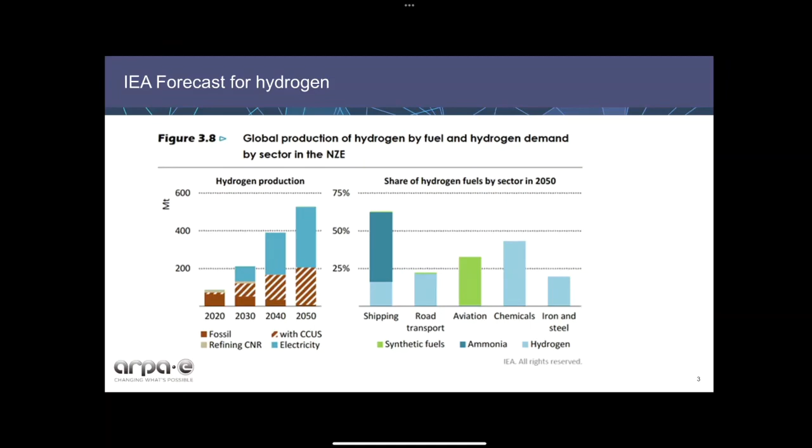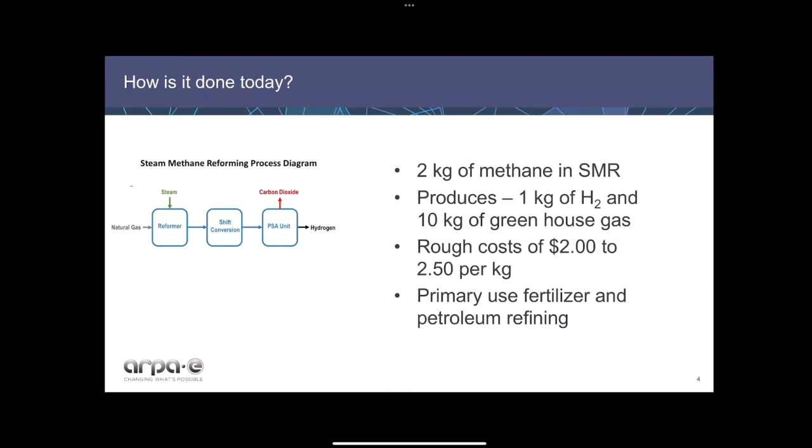So it's actually one of the largest contributors to greenhouse gases right now, even at the low production we have. Rough costs are somewhere between $2 and $2.50 per kilogram of hydrogen for that. Primary use right now is fertilizer and in petroleum refining, basically for upgrading in the oil industry.

So projected going forward, and there's lots of stuff. I mean, there's large amounts of money. The US government is dumping $4 billion, I believe, right now into hydrogen hubs. The vast majority of these are going to be going into carbon capture with SMR. And to make that 200 million tons that we're projecting in the future, it's 400 million tons of methane, roughly 20% of the global production of natural gas right now. They're talking about just going into the hydrogen side.

This is going to produce the 200 million tons of hydrogen. We have 4 gigatons of CO2 directly coming out of this to sequester. So that's 4 billion tons of CO2. And this really doesn't count the CO2 and methane leaks across the line, which are going to cause a lot of other issues.

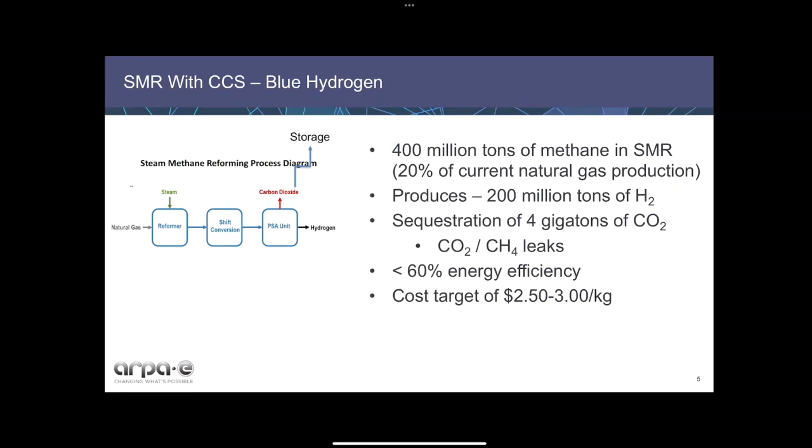Less than 60% energy efficiency. When you add it in, SMR is roughly 60% BTU conversion from methane into the hydrogen. This is less than 60% because you're spending a lot of energy capturing the CO2 and driving it underground. I've seen cost targets of $2.50 to $3 per kilogram for the hydrogen coming out of this. I've yet to see anybody who's demonstrated it yet at scale.

The other thing to look at is green hydrogen. This is the other majority of what the IEA is projecting. Take 18 kilograms of water, 46 to 50 kilowatt hours of electricity, and you get a kilogram of hydrogen. There's 3 routes out there being pursued: alkaline, solid oxide electrolyzers, polymer electrolyte, PEM cells are being looked at for this.

Your energy efficiency, so energy in versus hydrogen energy out, is somewhere in the 60 to 68% range before compression. So please keep that in mind. The numbers I'm talking here are the hydrogen bubbling out of the electrolyzers.

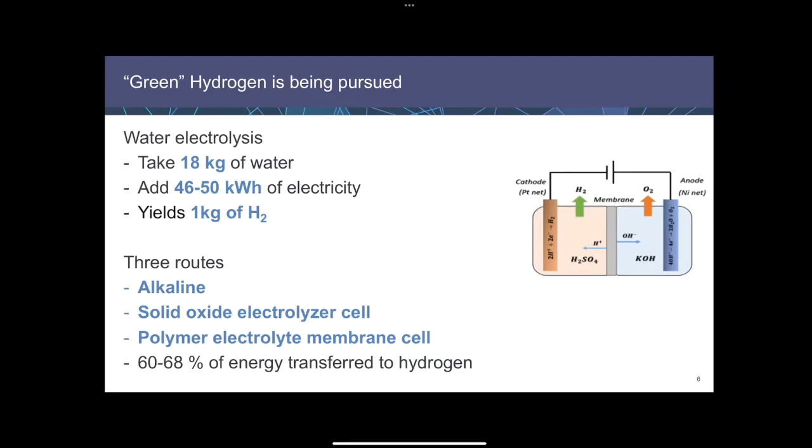To do our 320 million tons of hydrogen, and again, this is a conservative number. I've seen projections where people are now talking about 1 billion tons of hydrogen needed. So keep in mind these numbers could be double it. You have to put in 15,000 terawatt hours of electricity to do this. And this is going to require somewhere between 2 and something over 5 terawatts of generation capacity to do this. So the higher number is based on intermittency.

So everybody comes back, and you'll see this coming forward, such as the DOE Earthshots. To get the really cheap hydrogen, they say we're going to have solar and wind. It's going to be almost free. But then you have to worry about capacity factors. The sun only shines, wind is only so dependent. And if you have to start shipping in electricity from 2,000 miles away, the costs go up. So the higher number is for intermittent.

And keep in mind the global energy generation capacity right now, everything, nuclear, fossil fuels, wind, everything is 8 terawatts of capacity that we have in place right now. So this is a huge amount of electricity just to do a small portion of our energy demand.

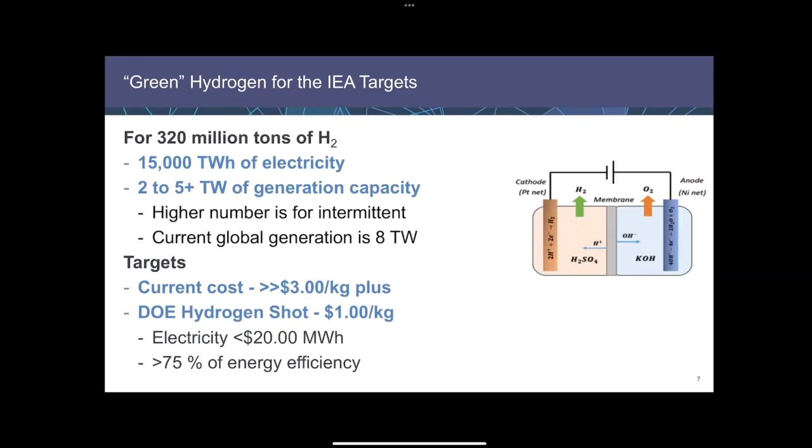So green hydrogen also has a materials challenge, and this is really my way into it, was from the mining side, because I have programs in the mining space, to look at what's required for this. And for 320 million tons of electrolyzer capacity, I took some of the numbers off of here, but for intermittent, we're going to need 2 to 4 times that electrolyzer capacity, just waiting for the intermittent electricity to come along.

So we're going to be looking at somewhere around a billion tons of electrolyzer capacity if we want to use intermittent. PEMs, platinum group elements, big challenge on how we're going to get that. I've seen forecasts that are anywhere up to 50 times current production of iridium is going to be required for PEM electrolyzers.

Solid oxide systems, you have lanthanum and yttrium as the primary solid oxides. And even alkaline, you're looking at nickel and zirconia that we really don't have a lot of. I mean, there's a fair amount of nickel, but class 1 nickel for this, you're competing with batteries. And what everybody forgets about is what goes into that intermittent electrical generation.

So for 5 terawatts of wind and solar, it's about 50 million tons of critical materials that go into that, to generate that material. So huge numbers. By the way, 50 million tons is 10 times our current production of those materials, just to power hydrogen.

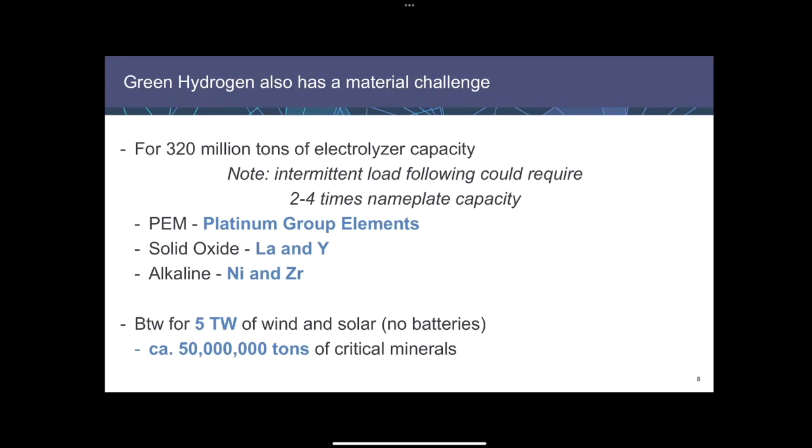So you're going to hear people talk about pink hydrogen. There's going to be a presentation to the Schlumberger people today saying, oh, nuclear is going to take care of it all. If we do that and we look at small modular reactors as being pushed by the DOE right now, these are about 30 megawatts per reactor, 0.27 terawatt hours per year per reactor of total terawatt hours. You need about 56,000 of these by 2050 to do that.

And by the way, the base electricity price, the lowest I've seen is $50 per megawatt hour or 5 cents per kilowatt hour. You take that into the hydrogen costs, and just your electricity cost is about $2.50 to $3, just for the electricity.

So pink hydrogen, by the way, I hate colors. I'm totally convinced that somebody's going to look at this with all these rainbow colors, and they're going to say, woke hydrogen, we don't want it. Get ready for it.

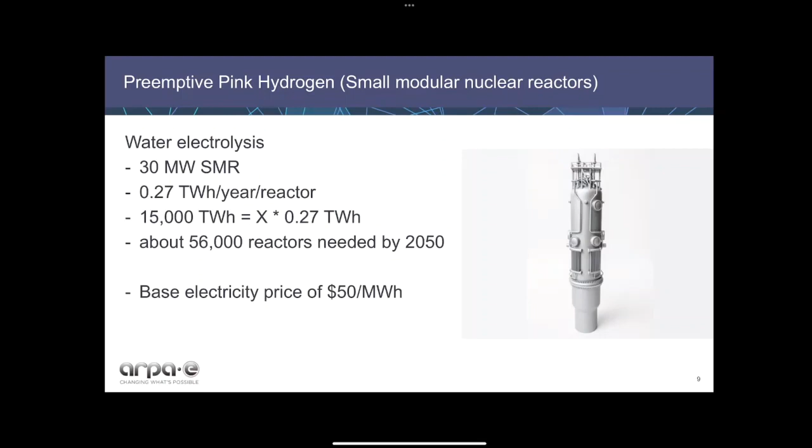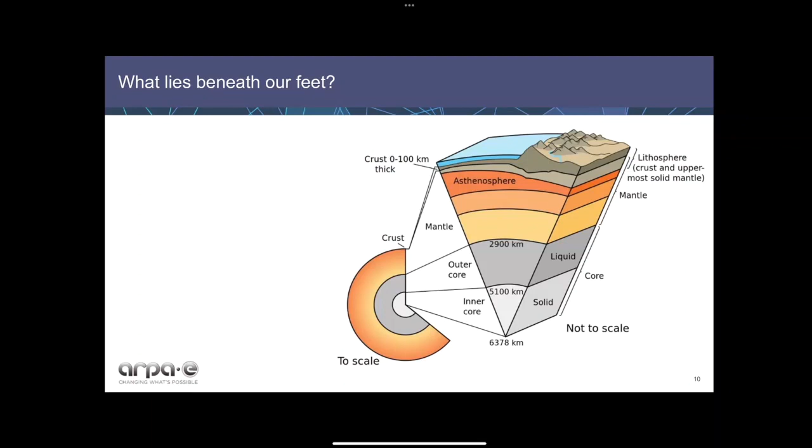So what lies beneath our feet? I kind of look at it and say, what can we do? And this is why I'm here, because you guys think about what's under our feet, and how do we exploit it, and how do we get through it. So the Earth is continually producing hydrogen. I mean, there's a huge amount of hydrogen being produced by the Earth.

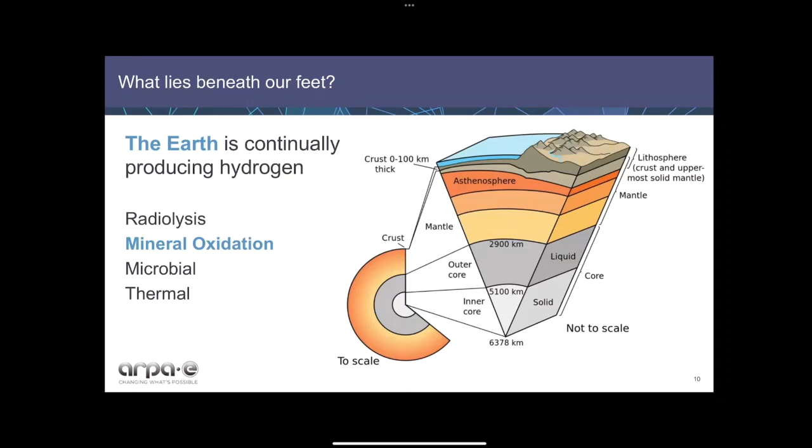Several different methods: radiolysis in the deep earth, mineral oxidation, microbial effects, thermal effects, all types of things taking place in the deep earth. The numbers I've seen are somewhere in the billions of tons of hydrogen that's being generated every year by the Earth. We just don't pay attention to it. A small amount of it does come up to the surface, and we'll talk about that.

Roughly 23 million tons is now the accepted number. It's probably going to rise pretty soon once they fully characterize what's coming out of Yellowstone and other thermal springs. That's currently coming up, and it's diffusing out. Some of it's escaping into space. Some of it is reacting with things in the air.

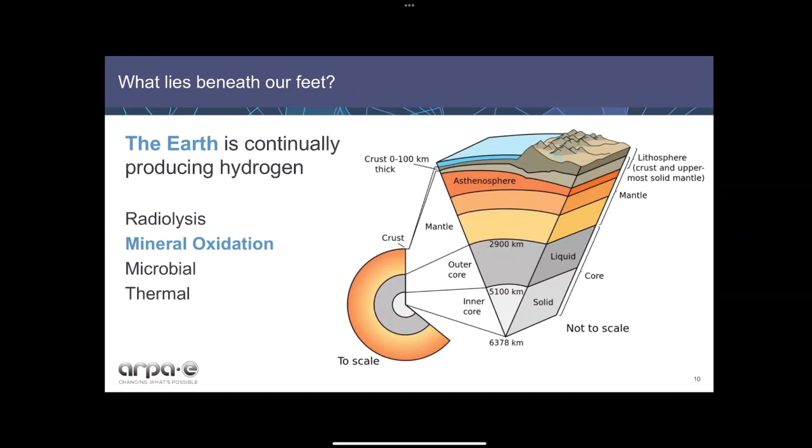So, seeps are found worldwide. So these are locations where people have actually found hydrogen percolating to the surface. And when we look at this, this is either gas coming out, free gas percolating out, inclusion gas where they're finding it in rocks, or water saturated with hydrogen.

So they're finding it. You'll see a huge emphasis on Russia and Western and Eastern Europe. For some reason, the Russians really like to track all the gases coming out of their systems and publish it. In the U.S., we don't pay as much attention to what's coming out in the gases, or we don't publish it. So lots of stuff. You'll see a number in the United States. By the way, this is filling in very rapidly since Slava wrote this paper. There's a whole bunch now being found in Brazil and Africa.

And this is one of my favorite ones. This is the eternal flame in Turkey. This is where the Olympic torch came from. It's a high hydrogen seep that's been burning for at least 4,000 years, and it's got a high concentration of hydrogen. It's got some natural gas in it, that's why you can see it. There are other hydrogen seeps that are burning that you can't see because hydrogen burns clear. And so they've found some basically by getting burned as they got close to it.

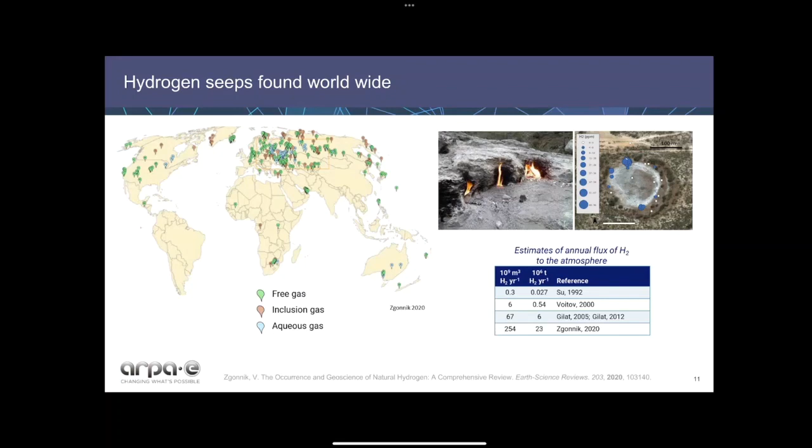So the concentrations of gas coming out in these locations can be really high. And this is a graph, and this came out from Alexei Milkov last year. He went through and took all of the reports of hydrogen, the concentrations, brought them back into rock types, and began to say, well, how much is there?

And so on the left is the concentration of hydrogen. And what I want to really point out to everyone is these types here on the left. These are not the types of rocks you guys have been drilling in for oil. These are very different areas. And so somebody's always asked, well, we've poked enough holes in the ground with the oil companies. If there's hydrogen out there, they would have found it. No, first of all, they're not looking for it a lot of times. They don't measure it. And second, you're just drilling in the wrong places for this.

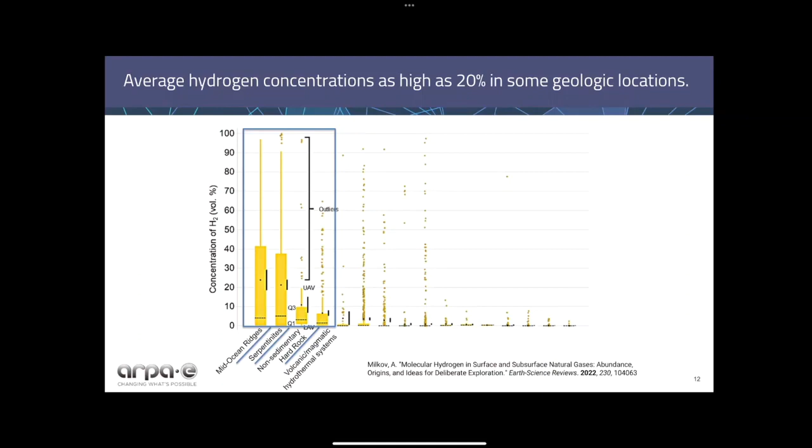But there's concentrations out there of all different ranges, all the way up to 98% has been found in deposits that are out there. We'll be touching on this. And so where does hydrogen accumulate? One of the classic examples is outside of Bamako in Mali. This is looking at the system from space, looking down on it. This is a huge fairy circle, right? You can see the distance, about 1 kilometer across.

A group out of France, I can't remember which one of the energy companies of France, is trying to exploit this. By the way, they found this by accident. They were drilling for water, and somebody walked up with a cigarette and the well blew up. And it was just like, what? This clean explosion just blew everything up. And somebody heard about this in France and said, natural gas. And they went down and blew up a few more things, but came back and really started doing measurements saying, oh, hydrogen.

And the graph on the right is the emissions across this fairy circle. So they're picking up hydrogen that's diffusing out of the ground into the air. And when they drilled into it, they found out it was 98% hydrogen, free hydrogen gas. And this is an area where they've drilled down and actually found hydrogen at a whole bunch of different levels that's being trapped underneath a variety of sedimentary traps, competent traps that hold it in place. And they're still working on how big this is and whether they can commercially deploy it.

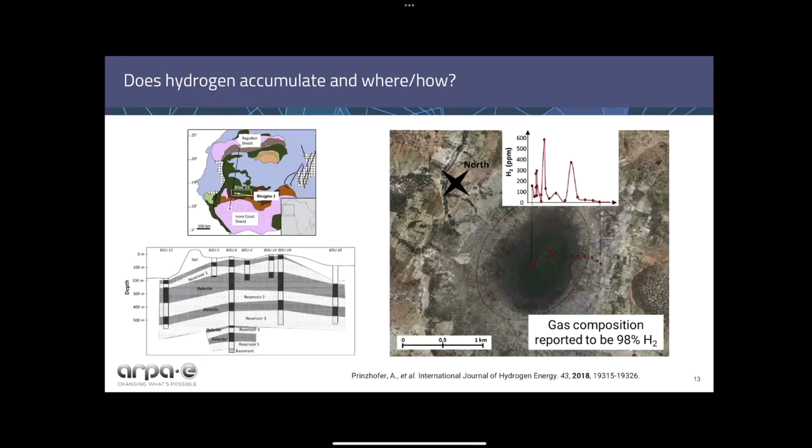Okay, and one of the first things we did was ask, could you make money off of this at $1 a kilogram? This is a calculation we did early on: if you only have to drill 100 meters, you could use water drilling rigs, PVC pipes going down, cheap costs, and a hydrogen flux of 1,000 cubic meters per day, which is about what these guys have published. It's not a huge amount, but this could come in at $1 per kilogram at this depth. Of course, then what are you going to do if you only have 1,000 cubic meters per day? It's really not worth looking at.

And we have to look at that, this is a small fraction of what an average natural gas well is. So the question is, can we take this and stimulate it? So it has enough to power a little PEM electrolyzer, and probably continue to power part of Bamako, Mali with this.

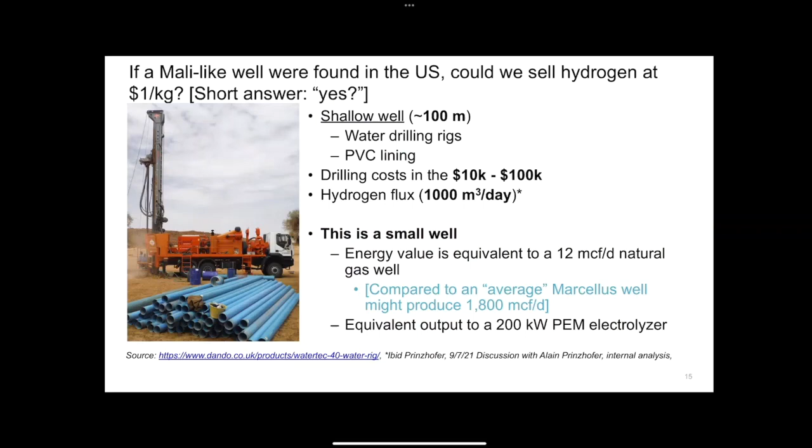So a number of things are going to come back, and we have to look at concentration. And again, this is for natural deposits. We have to look at concentrations, how deep they're found. And you can see conventional reservoirs over here. This is your guys drilling for oil.

We're finding low concentrations, and there's actually really good reasons why there's low concentrations in natural gas, because if it was there, it could be turned into something else. But we can find a variety of different concentrations. The thing I want you to pay attention to, again, is the hard rocks, is where you're finding high concentrations close to the surface. All the high concentrations are in hard rocks. So it's taking us away from where the oil and gas people like to drill.

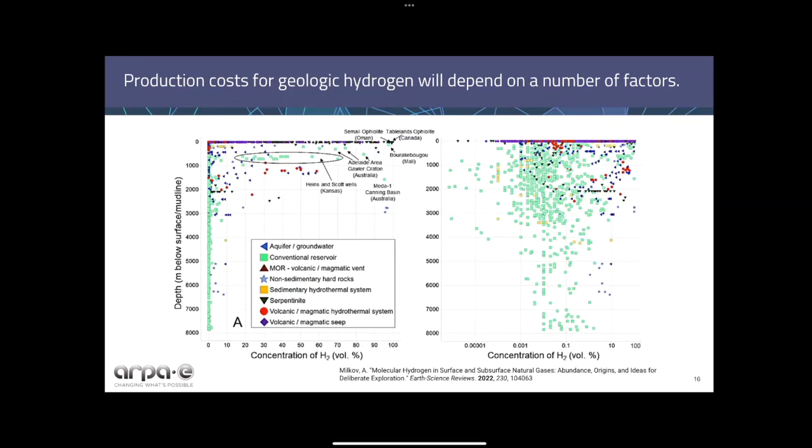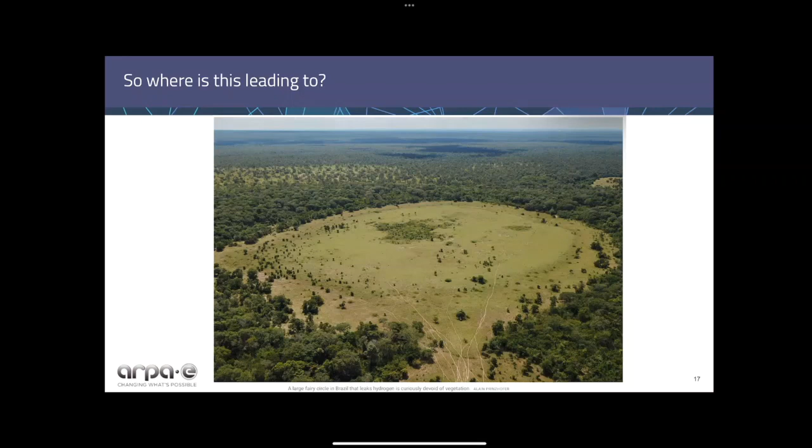So this is from the Science article that just came out, and begin to look at and try to understand where this hydrogen is coming from, and then why. Take that information and come back to say, why am I here talking to Schlumberger about this?

So there's a variety of mechanisms. As I said before, you have the radioactive methods, you have the iron oxidation, you have abiotic methods and the likes, with a whole bunch of stuff eating it and surviving on it. By the way, the vast majority of the hydrogen that's produced on the Earth goes into microbes. Keep in mind that underneath our feet is well over half the biomass on Earth, and the majority of it is powered by hydrogen.

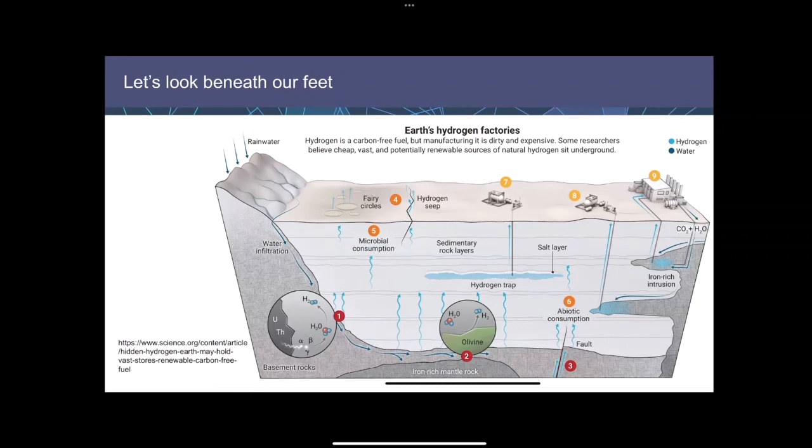So what's happening underneath our feet? Again, we have radiolysis, serpentinization, deep-seated, which is tectonic plates ramming together and causing all types of piezoelectric reactions to take place in hydrolyzed water or powered water. And the loss mechanisms, we have some coming to the surface, small amount, microbes and abiotic reactions. And the abiotic, you guys can look at and say that's future oil. So this is where a lot of the oil is coming from.

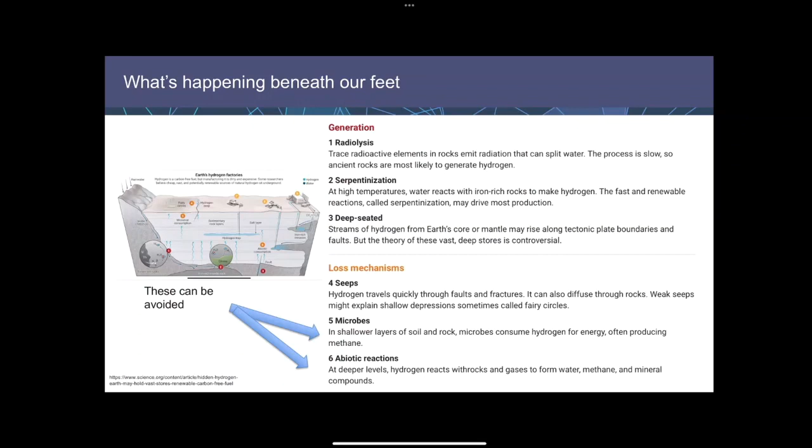And what I'm going to posit to you guys is we can avoid these. These two can be avoided, the abiotic reactions. And if I look at the generation of the system, I can control the chemistry of serpentinization. So this is a chemical reaction. Radiolysis is deep in the Earth, unless we're going to find a way to inject thorium down into the deep Earth and allow it to power the formation of it. The serpentinization I am very attracted to, because, again, I'm a chemist, I look at this and say, I can drive this reaction.

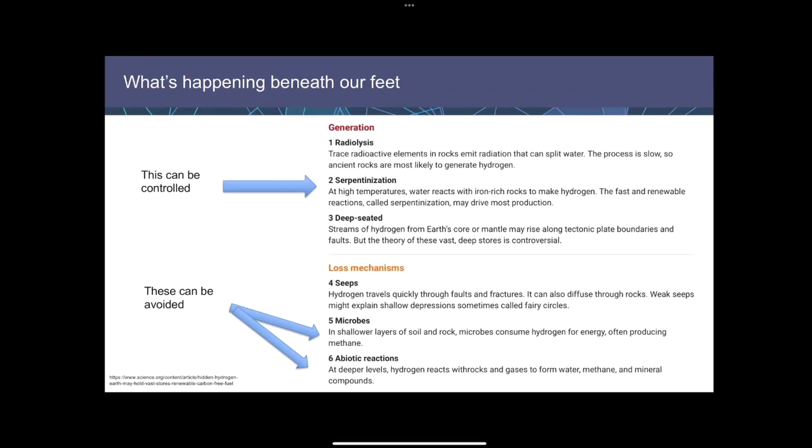And this is a specific reaction we're going to look at. Very simple, iron 2 compounds plus water gives you iron 3 oxides, rust, and hydrogen. It's a very straightforward reaction. The important thing to keep in mind, if you look at the Earth's crust, 5% of the Earth's crust is iron 2. So if you look under your feet, wherever you are, you're going to find iron 2 beneath you. Everything below the surface, again, is very reduced. We live in the oxidized portion of the Earth. The reduced portion of the Earth is beneath our feet, waiting to be oxidized.

The one thing I should have written on this, and I need to update this, is an equilibrium. This reaction is an equilibrium reaction. It's not a one-way. It's not thermodynamically precluded, but it is not favored based on equilibrium. Equilibrium lays way to the top. But if you take out the hydrogen, it is a very fast reaction. So you can get this reaction to go in what I like to say is the attention span of a graduate student if you pull away the hydrogen.

So in the deep Earth, quite luckily for us, equilibrium lays to the top. If the equilibrium did not weigh to the top in the deep Earth, we'd be living in a hydrogen atmosphere with no oxygen or water, because there's enough iron 2 down there to consume everything.

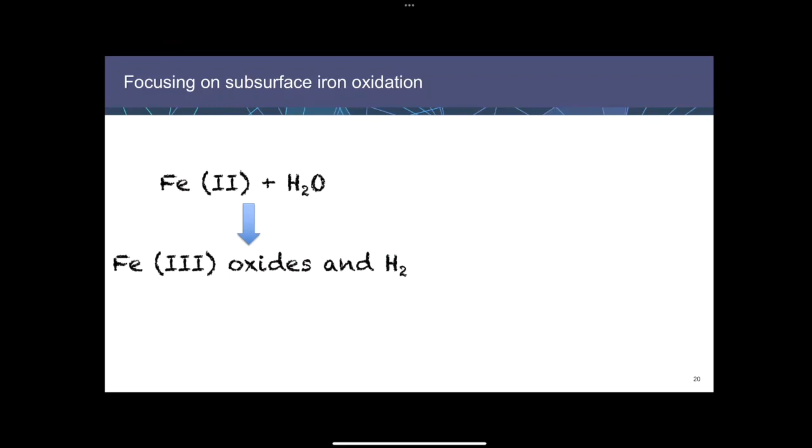So 5%. So what is the potential? If you look at this primary target, in situ oxidation of iron 2 with water, 5% of the Earth's crust being iron 2. Estimates on this, looking not at the ocean side of it, so just on land, within the range that you guys can get to, are 10 to the 15th tons of hydrogen potential laying beneath our feet.

I mean, that's millions of billions of tons for those who could do the conversion quick in their heads. So it's millions of billions of tons. The thermal energy of that far exceeds all the fossil fuels underneath our feet. It's just sitting there.

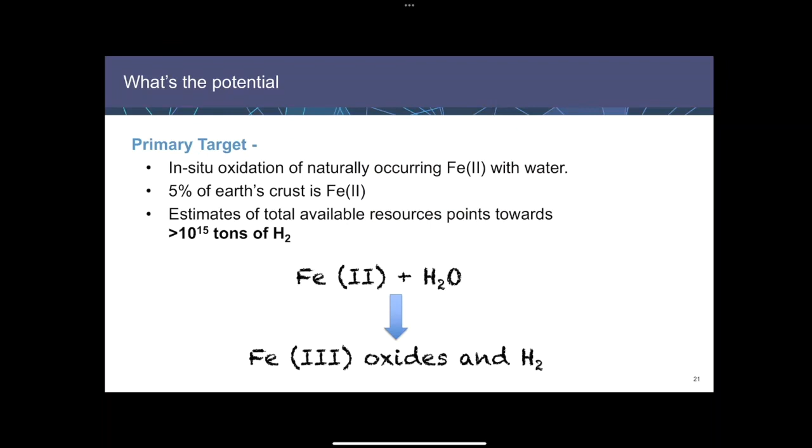I talked about Geoff Ellis at USGS. He's doing a fantastic job of modeling resources for this right now. I fully encourage, if you haven't had any contact with him, that you have him in to give a seminar, which will be much more informative than mine in terms of the basic science of it.

He's developing models looking at sources, migration pathways, reservoirs, traps, seals, preservation, timing, taking all the things that have been done before for oil and gas accumulations by the USGS. So really in-depth models of this stuff, really looking at the important differences. Hydrogen generation is really fast.

It's not like oil and gas, not like methane, where you're looking at geologic time spans to get your future oil. This stuff is forming fast. Again, if you allow the hydrogen to diffuse away, the reaction's almost instantaneous. Hydrogen's much more diffusive, it's slippery, it's going to diffuse away, and this has big impacts on this.

There are solubility differences. At ambient pressures, the solubility of hydrogen in water is close to nil versus methane. And it's also more reactive in both biotic and abiotic systems than the hydrocarbons. So there's a bunch of challenges we have to look at. And he takes these kinds of systems and has developed some great mapping capabilities.

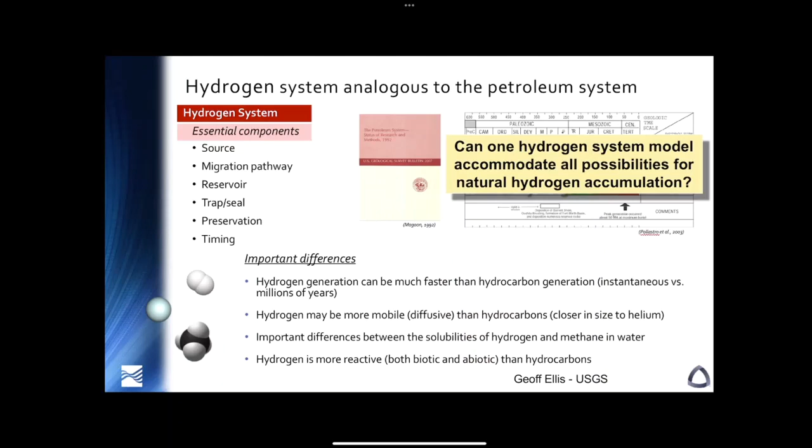He's asking, can I come up with one hydrogen system to model all this? And the answer's going to be no. But quite interestingly, he already has the programs set up. You can type in the different variables that you want and begin to map where we should be looking for hydrogen.

The whole thing, from Oklahoma all the way up to Michigan, up to Canada and back down to Michigan, is loaded with olivine. The same thing is found off in the Carolinas, and there's a belt going across Arkansas.

These are massive deposits. One thing I want you to keep in mind is that oxidation of iron 2 to iron oxides forms a 60-40 mixture of magnetite and hematite. Don't ask me why, I just can write it out. Find yourself a good geophysicist or geochemist to explain why.

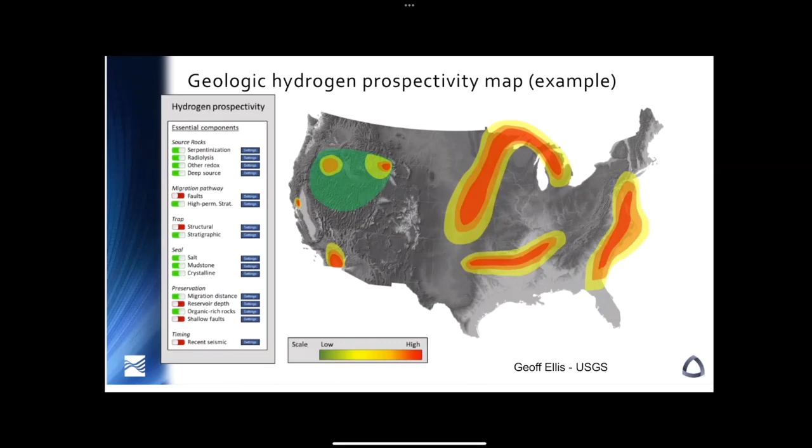So you might be breathing hydrogen. The water inside of you might come from hydrogen from geologic sources. So now we're going to get into what I'm thinking about, and really what I want your input on. This is quite critical for us.

Again, when we talk about 10 to the 15 tons, as I've told people, this is like the multi-billion-dollar lottery ticket. It's worth spending $20 on, just in case, because it's potentially a limitless supply of energy for us. So we're looking at 3 tracks. Can I affect the chemistry of this reaction? Can I stimulate it? Are there ways to catalyze this reaction? And there are, by the way. People are coming up with ways to catalyze this and make it go faster.

We need work in the geology, really coming back to identification of these deposits far beyond what the USGS is trying to do, because then we need to bring in things like permeability. How do we identify competent cap rocks? Because really what we want to do is be able to stimulate this and concentrate it under the ground.

By the way, people have asked me, could you dig up these rocks and do it? And it's like, no. In an olivine rock of 10% FeO, you're looking at 0.5 kilogram of hydrogen per ton of rock that you dug up. So it's not worth digging up billions and billions of tons of this stuff.

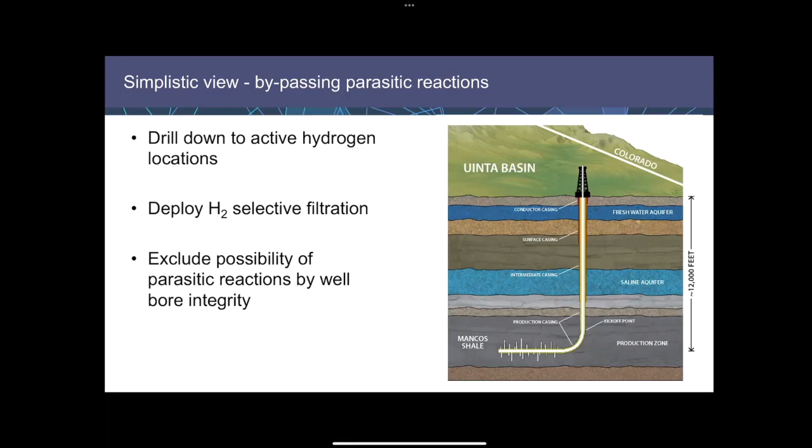Can we take a simplistic view and really take lessons from our geothermal colleagues who are looking at enhanced geothermal? Basically drill a couple wells, inject water into an appropriate ore, suck out the hydrogen. It's been oxidizing the iron, so you get no digging, no byproduct separations.

By the way, the one thing I want to note here is this is not an energy carrier. This is a primary energy source. So unlike the electrolysis of hydrogen, it'd be pretty stupid to electrolyze hydrogen like you see the Japanese talking about doing, and then shipping it up to Japan, burning it to make electricity. You're losing a lot of efficiency in doing that. This is a primary source. So not an energy carrier, just the primary source.

And by the way, the EGS people are finding hydrogen. If you take a geothermal well in Iceland, it's producing 1 million kilos of hydrogen per year. So it's happening, and it's vented into the air, along with all the CO2 that comes up with the rocks. The EGS people, I asked them, what about hydrogen in your systems? And they're like, oh yeah, we see it. We don't tell anybody about it. We find a lot of it when we start, and we find a lot of it when we stop. And if you think about this, they're not pumping a lot of water down when they're starting and stopping. So they're actually getting a continuously fairly high flow.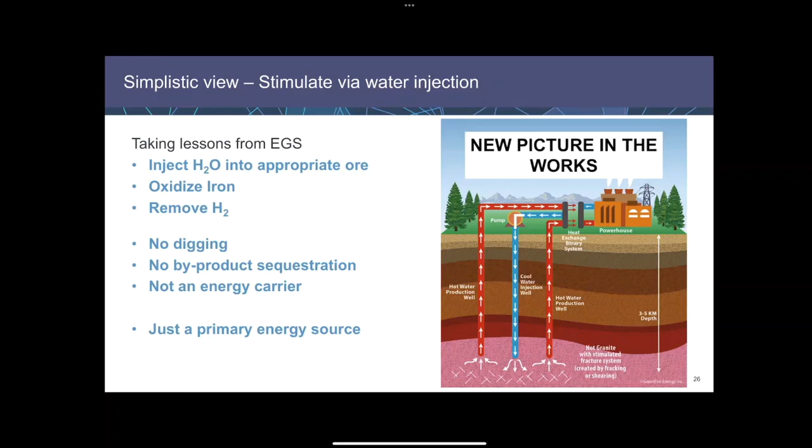So it's been mentioned when we talk about stimulating this reaction. This is some really neat work, again, that was published last year. So everything, by the way, you'll notice a lot of 2022s coming here. So this is a building topic.

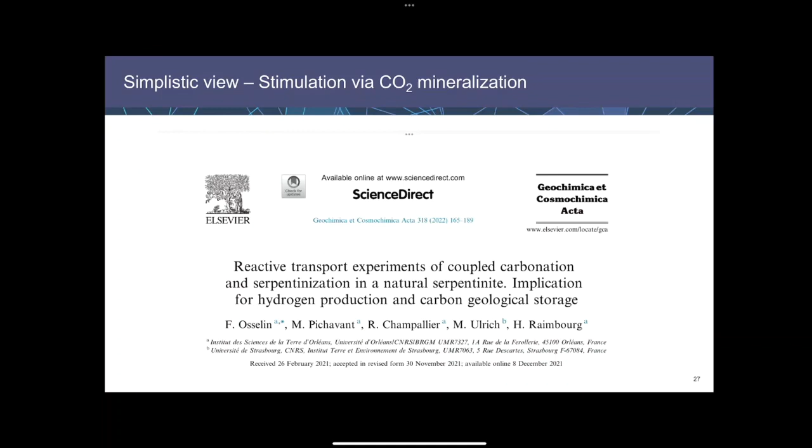And the gist of this work and subsequent work that's coming out of this, again in 2022, or now in 2023, is mineralization of CO2 greatly enhances the production of hydrogen out of these systems. They have not looked into an existing deposit to do this. This is all laboratory experiments so far, where they set up a fairly complex pressure cell and are able to go through and monitor this.

And there's a number of groups that are now developing similar systems. So I think we're going to see laboratory experiments that will allow us to understand how do we catalyze this reaction going forward with that.

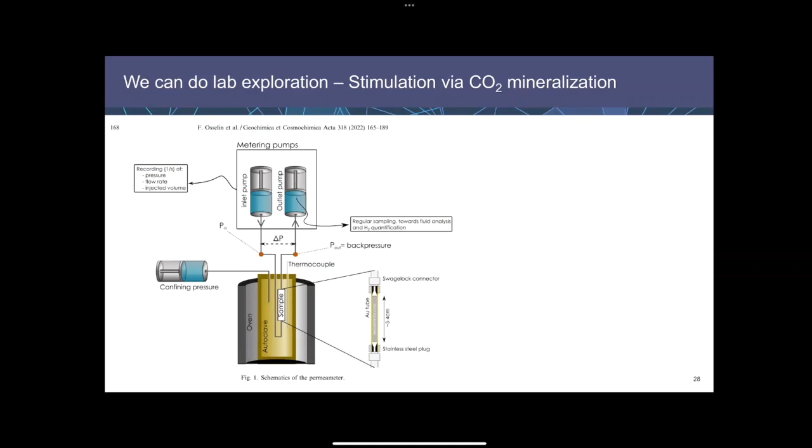So kind of wrapping up here, look at this. These are the questions I'm looking to have you guys answer. We have risks. There's a lot of risks here. How do we avoid that inadvertent release to the atmosphere? So if we're stimulating over here and it starts bubbling up on somebody's spring next door, how do we avoid that? How do we maintain containment of that? Can non-leaky reservoirs be developed? Can we develop these things where the hydrogen accumulates and we can then pull it out from the system?

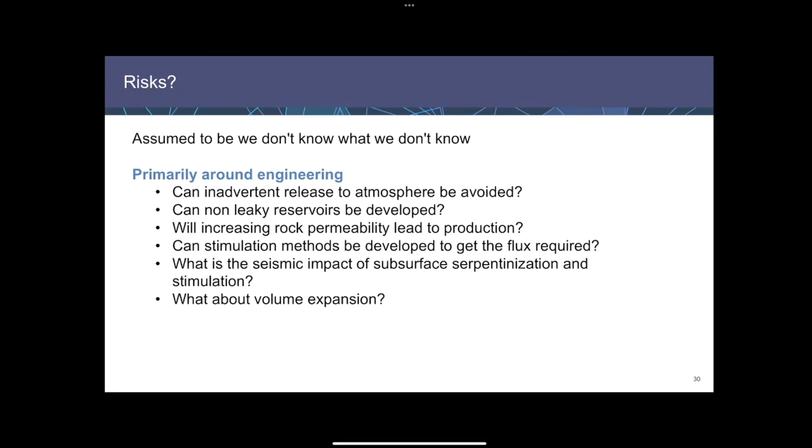And what are we going to do about the volume expansion? These serpentinization reactions lead to about a 40% change. If you go from olivine to serpentine, it's about a 40% increase in volume. What's going to happen? How much of the world are we going to lift up?

So metrics in a true white space. This is one of those ones at ARPA-E, we always have to put metrics on things. And when you're in a white space and you have no reference point, what do you do? Because everybody likes to say we're going to see X% improvement, X% reduction within this. And this is a challenge for us because nobody is looking at geologic hydrogen.

Are we going to reference seeps in the ground? So I'm going to come back and talk about this eternal flame in Turkey and say it's putting out 250 cubic meters of hydrogen a day. We're going to go from there. We don't know about flux. How much do we need to really get going to make this economical? And how do I measure improvements if we have no reference for this?

Purity. This is a big discussion we're having: how pure do we want to get it to come out of the ground? With natural gas you can set up such that after you bubble off all the CO2, you can get fairly high purity methane directly out of the ground and dump it into a pipeline. Is that going to happen with hydrogen? I don't know.

So this is your guys' chance to tell me, what are the metrics for success? If I'm going to do midway checks, let's say I fund people to do research in this area. What am I going to be able to tell in that first or second year that they're being successful? Kinetic enhancement, equilibrium control, conversion of the available iron, are these important?

Environmental assessments. Are we going to be having water coming up out of the systems like we do with oil? What do the seismicity and the LCA look like for these things? These are questions that I'm looking for input on. And for a final, what do we look at? Cost at the wellhead. What should the cost of hydrogen be at the wellhead? What about purity? Should it be greater than 20%?

I picked 20% for a specific reason: if it's coming up with wet CO2 and hydrogen, it happens to be the back end of an SMR, so you can do pressure swing adsorption. So I know what that costs. If it's not wet CO2, there are membranes that at 20% are economical for separating hydrogen. Greenhouse gas footprint. Again, these are all swags, by the way. I just made these numbers up the other day.

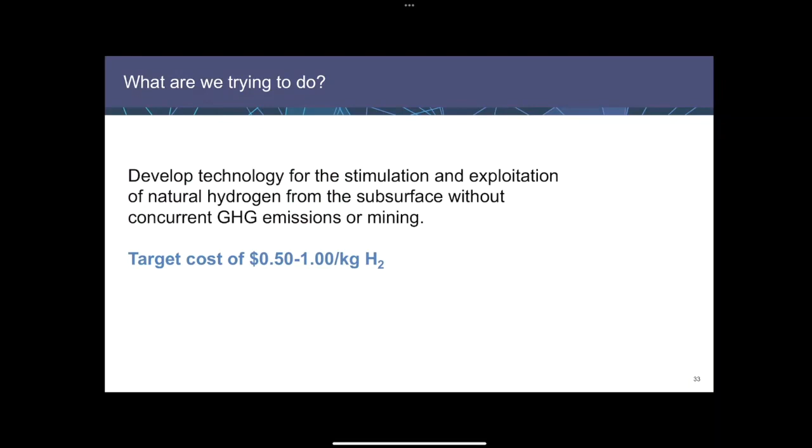So, what's your input?